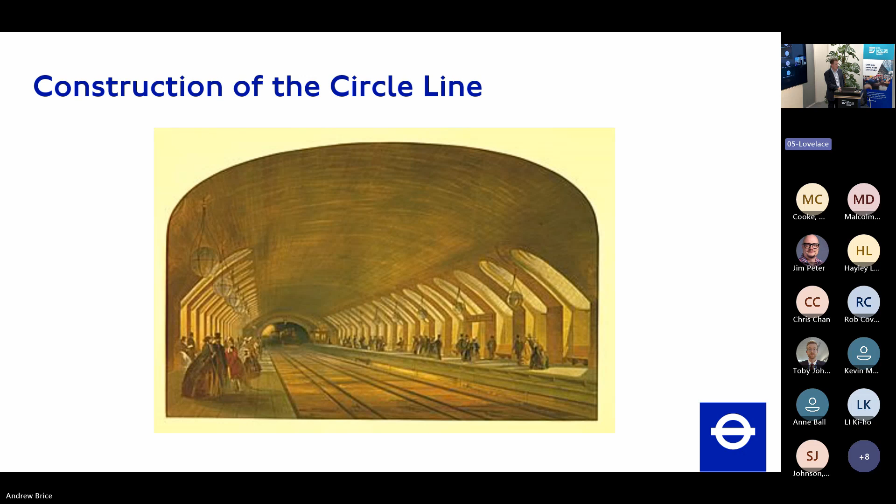So in terms of where we're going to go, we'll start by talking about ride quality, then structure gauging, platform assessment, train arrestors, conductor rail, and what I loosely call 'others.' It's not to demean the others, but we'll spend more time on items 1 to 5.

So generally speaking, in our experience designing a train, one of the things we're interested in is looking at the movement of the vehicle within the specified kinematic limit. We know that's a trade-off between the space that is available, the way the track is maintained, and the suspension of the vehicle.

What we don't want is a track that's so difficult to maintain we can't get out there and maintain it. Equally, we don't want a vehicle that moves so much in response to the track that we can't predict its movement, and it doesn't keep within the kinematic limit going forward.

Particularly for London Underground, access is at a premium. There's next to no places where you can store things. So in essence, the tools and equipment we take down at the start of engineering hours and take them back again at the end. Logistics is a major issue from the viewpoint of the track engineer, and therefore getting the right balance between the two is key.

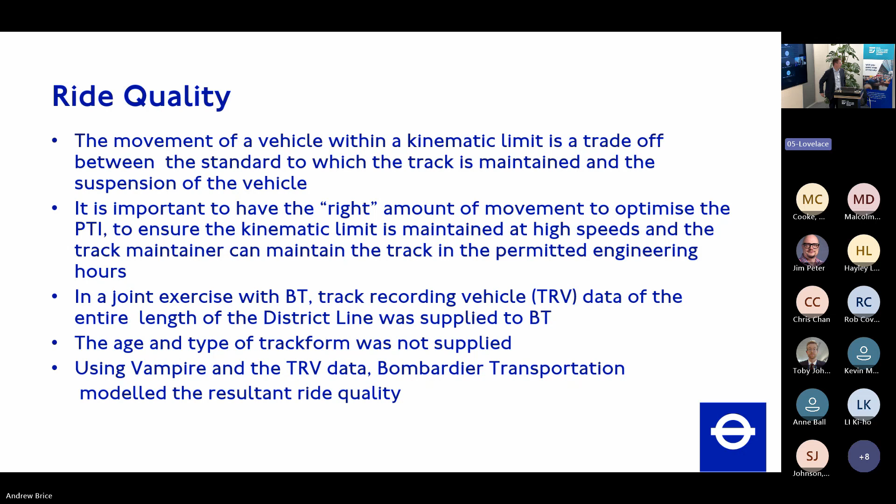When we did an exercise for SSOC with what was then Bombardier, we looked at track recording vehicle data for the entire District line. We didn't tell them the age or type of track form for the data. They then used the TRV data with Vampire to model the resultant ride quality. What came from that was they identified an issue with trains running faster than 70 kilometers an hour, where the set ride quality parameters were exceeded.

We translated this through into a ballast memory issue, to do with the way the track used to go down in 18-meter panels joined together. The pleasing thing was that on the one section of the District line where it did meet the ride quality parameters up to 100 kilometers an hour, that coincided with where we renewed the track.

So from the viewpoint of the track engineer, this was immediate validation that we were doing the right thing from the viewpoint of the rolling stock engineer and standards. We then repeated that for sections of the Metropolitan line where we carried out track renewals, and there was a good correlation between the two. So, independent validation of why we were renewing track, and that we were renewing it to the right standard, which is always pleasing.

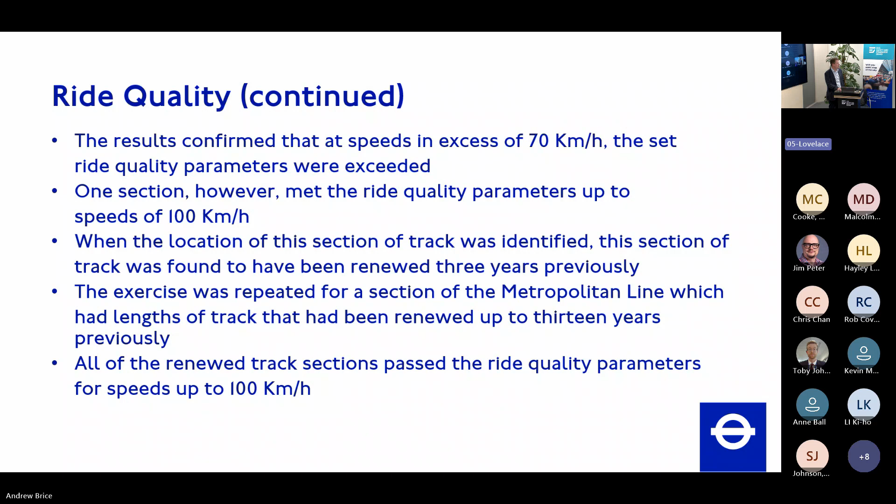In terms of structure gauging, I apologize if some of you have seen this type of slide, but very much on the Underground we have something called the kinematic limit. The kinematic limit is independent of speed, or up to 100 kilometers an hour, depending on the particular line speed. The idea is the train stays inside the blue, and the infrastructure stays outside of the structure profile.

Now, for a lot of undergrounds, compared to the mainline railway, we tend to work with smaller margins. Typically, for the subsurface railway, we look to have 50 millimeters between the kinematic limit and the structure profile, so that when a train runs, it should have about that much clearance between the two.

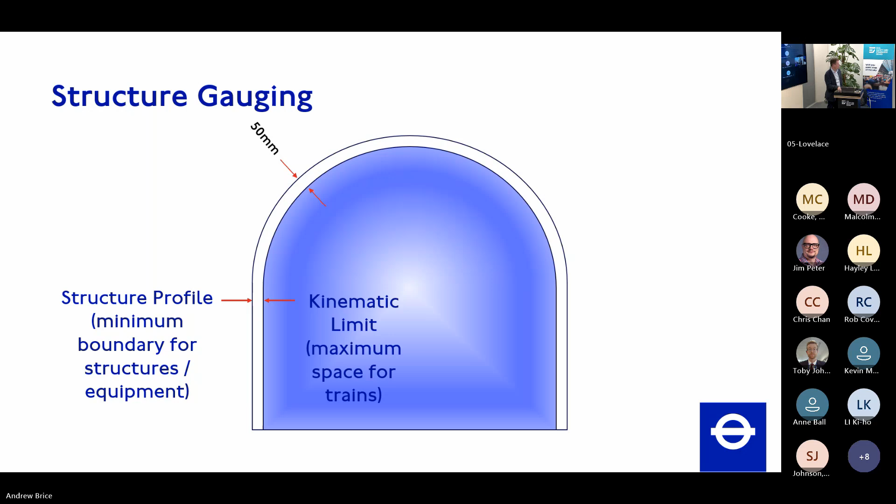When we start looking at issues with new fleets, the first thing we say is, okay, we've got standards, we have a set structure profile. The structure profile will vary between where tube trains run and where subsurface or surface trains run. But the first question is, are we compliant? Because with the best will in the world, given the age of the infrastructure on LU, invariably there's somewhere where we're not compliant.

We then ask ourselves, if we go with the kinematic limit as specified in standards, what will a concept vehicle give us in terms of maximum capacity, i.e. how many people we can carry, compared to the need for safe, adequate clearances?

Having completed questions 1 and 2, we then go and talk to our stakeholders and say, what remedial works do we need to do? So, for instance, when we were looking at SSOC, we identified approximately 10 kilometres of the Circle line that would need to be rebuilt. Now, that doesn't pass the value for money test, and it's certainly not practical, and it wouldn't meet timescales.

We then go to platforms and ask ourselves, what are our existing heights? Are we generally compliant to standards? Are we high or low? And then, with the concept train, what does that mean in terms of what we would need to do? How can we optimize the platform-train interface as much as possible based on the existing infrastructure? If we need to make a change, what are those changes, and what's involved with doing that work?

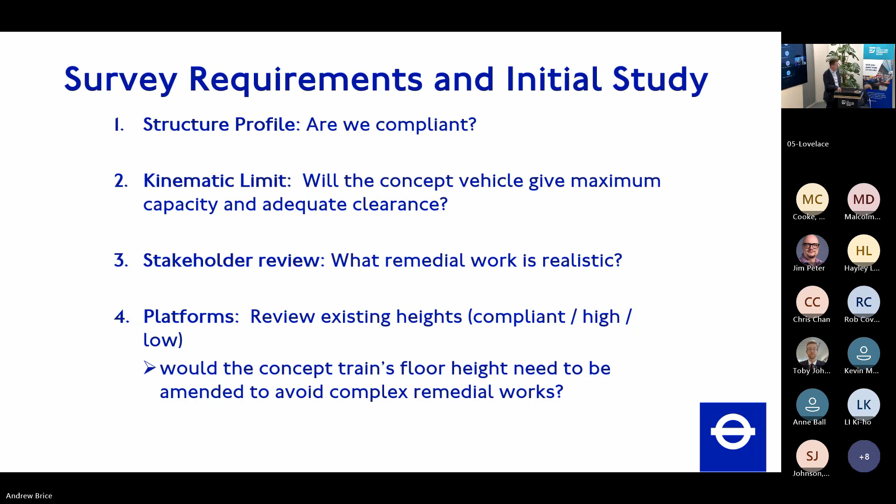So if we move on, we've also had a bit of a technology boost during the last 20 years. If you look at these photographs, prior to 2004, it was very much conventional wooden gauges that had been used for the previous 100-odd years on London Underground. They are good in the sense that they give you an immediate visual image of what's going on, and relatively speaking, you can identify what is the offending part of the infrastructure. But it's very labour intensive.

As you can see from the subsurface frame on the left-hand side there, typically you need 3 or 4 people to move the gauge as you go along the track. And it's also quite difficult to gauge readings around the profile.

The tube is a little bit easier to work with, again, a good visual image, but once you've taken your measurements, the iterative process is quite difficult.

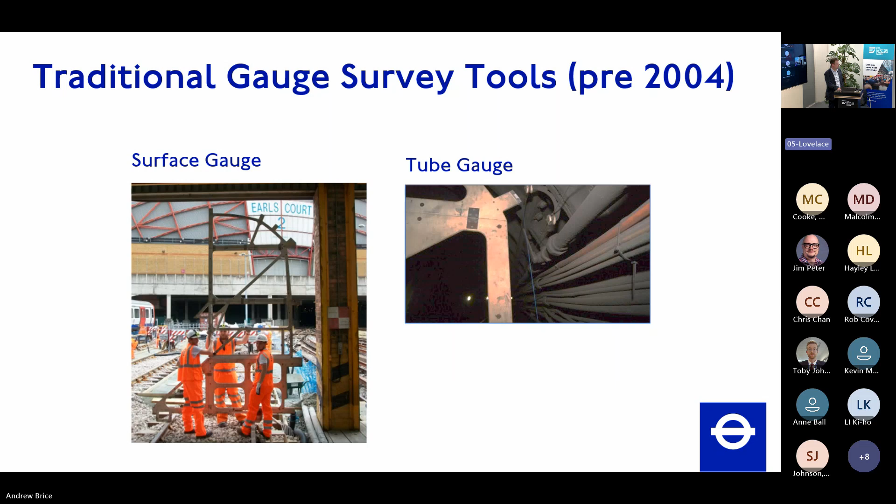Following on from post-2004, as much as the railway industry is now, from the viewpoint of track, both on mainline and on TfL, we all tend to use the type of equipment you see here, where you've got a scanner based on a trolley that runs on rails.

The issue you get, particularly from an underground perspective, is that as you push the trolley through, you actually generate a helix, and the distance between the helix is key for the type of clearances you've got.

Unlike Network Rail, who have their own train-based gauging system which runs through the network, because they generally have greater clearances than are on the underground, that's an appropriate technique for them. If you try doing the same thing on London Underground, you'd probably miss most of your clearance infringements, so there needs to be something done in greater detail.

We've been working with companies like Leica and others to evolve this equipment and the post-processing afterwards. So from the scan, what we end up with is a series of sections, and against those sections we plot on the vehicle profile, allowing for curvature and allowing for cants.

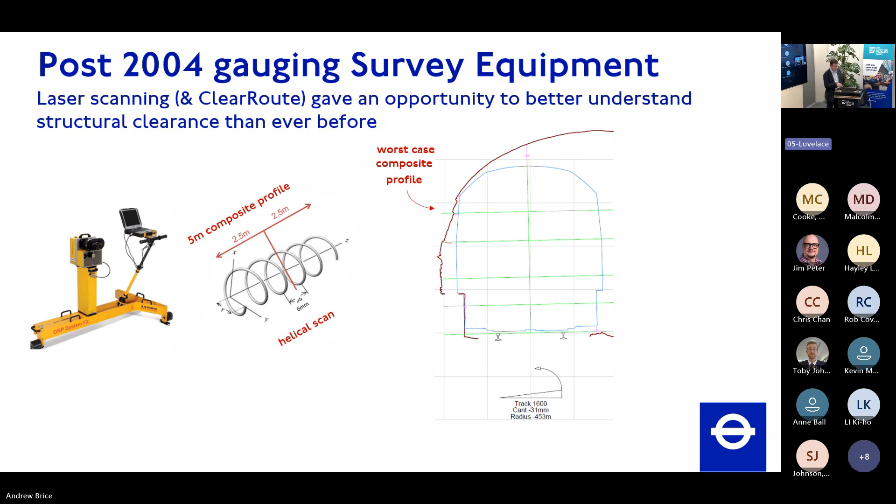From that, what we can end up doing is saying to ourselves, well, if our infrastructure is quite difficult to modify, what we can do is put together a composite infrastructure outline and then say, what does that mean in terms of our kinematic, and do we make a modification to kinematic? Obviously, the trade-off is if we have a smaller kinematic, that impacts on the train builder, but it depends where that is.

That's something we did on this example here for SSOC back in the heady days of August 2004.

What was also quite interesting for our civil colleagues is that we identified that the previously thought-of horseshoe-shaped tunnels had actually flattened over a period of time, and that there was a clash around the cant rail level here that was very difficult to resolve from the viewpoint of the civil assets.

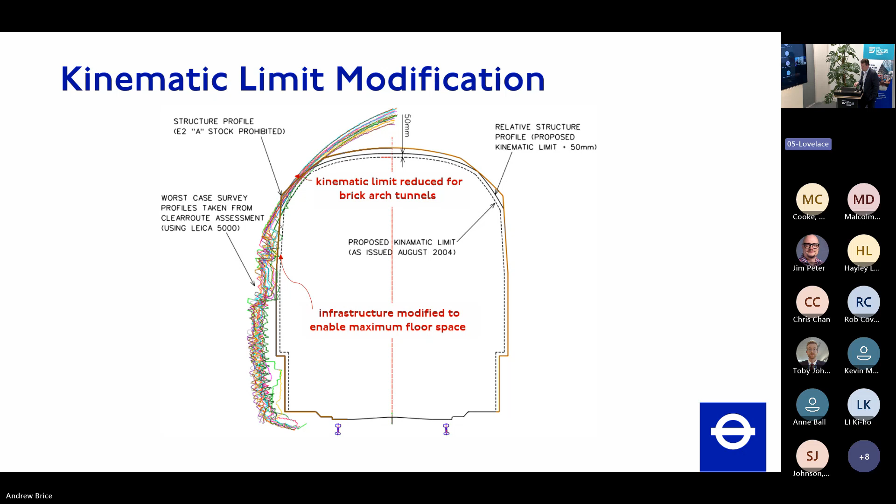So we took the decision that we would make the kinematic limit smaller in that area, but in terms of the usable space for passengers, that was maintained. That would seem to be a reasonable trade-off.

That has maintenance tolerances. The train itself has tolerances in terms of how it's maintained and how it responds, but also in terms of how it's built. We did have a windy Friday afternoon in Neasden when we measured across the train, and it was a different dimension to what we were expecting. But Bombardier assured us that's okay, and we worked on.

Equally, platform nosing is maintained. They do replacements, but they won't necessarily check it back against the optimum track position, and therefore you can start to lose that relationship between the two. So, within those three, there are tolerances.

Gauging by its very nature is very conservative. If you're not careful, the build-up of tolerances can work against you. So, because we were trying to optimize the space between the train and the nosing, to try and bring it down as small as possible.

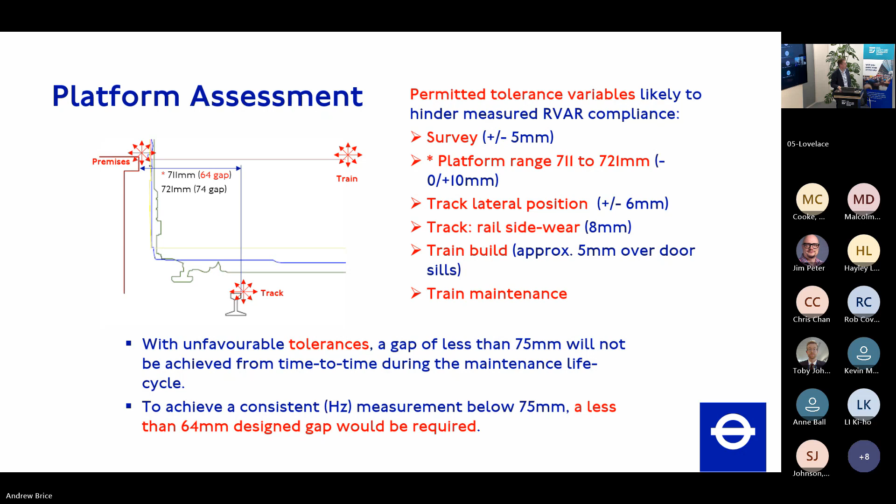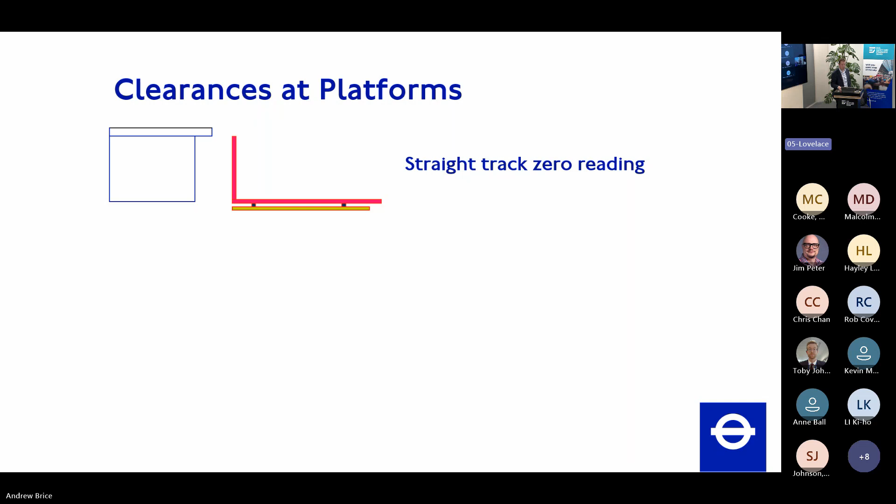So in terms of clearances at platforms, straight level track is really easy to work out. Fortunately, London Underground doesn't like straight level platforms. You then move on to a situation where the track is canted away from the platform. That's great from the viewpoint of the ends of each individual carriage, because of end throw, they get closer to the platform. But if you have doors towards the centre of a car, they move further away from the platform, so your gap gets worse.

Equally, if you go the other way, the centre of the train and the doors closest to the centre of a car are closest in terms of distance between train and platform. So you then end up asking yourself, what have I got in terms of combinations of curvature and applied cant? And particularly from the viewpoint of complying with the RVAR regs, where do I end up electing to choose the doorways that I'm declaring will be RVAR compliant for as much of the particular line as I'm working on? There's this whole iterative process to go through.

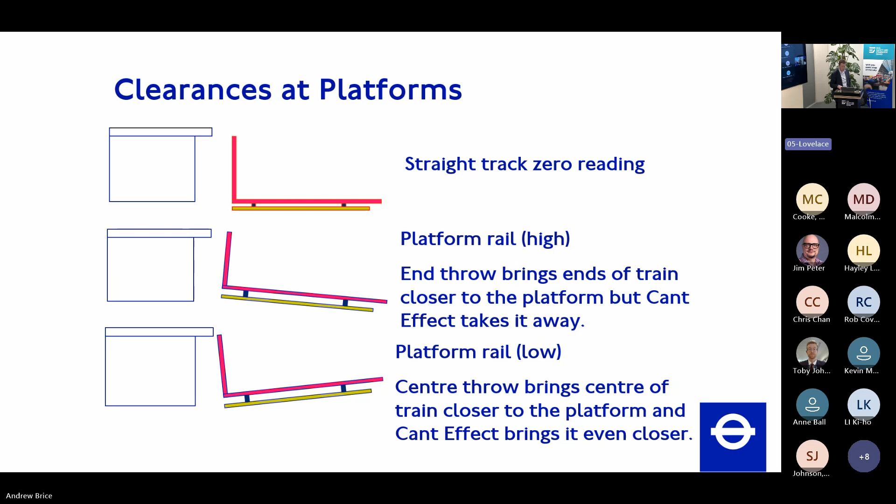The other thing we found we have to take into account is that while you're looking at level access for a train that's at rest, trains obviously brake into their stop position and then accelerate from their brake position. For London Underground trains, a train as it comes to the top of ramp in the direction of running, the front of the train is doing approximately 35 miles an hour. When the back of the train gets to the top of ramp, it's at 0 because you braked. Then for the back of the train as it's leaving the platform, the front is at 0, but the back is doing 35 miles an hour.

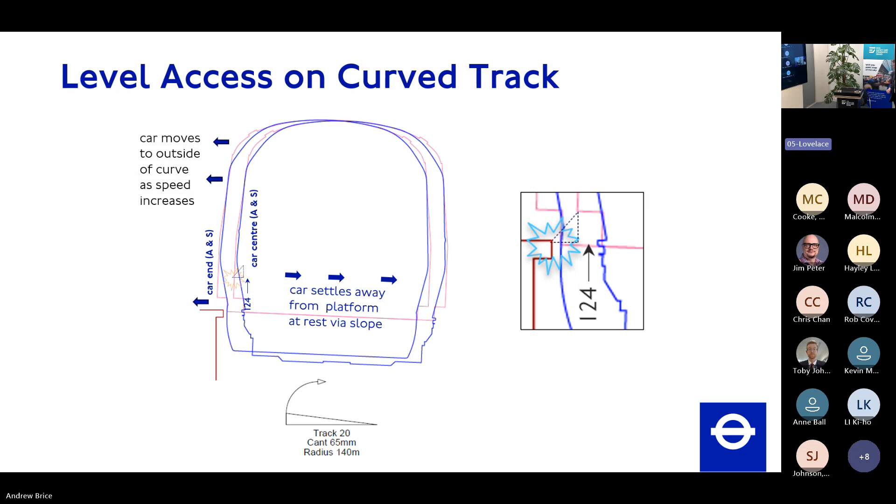One of the things we ended up pioneering for Deep Tube was platform humps, such that at the RVAR nominated doorways - in this case for 09 stock on the Victoria line - we would have steps and gaps at the nominated doorways where the offset was less than 75 millimeters and the vertical step was plus or minus 50. These have worked quite well, not without issue.

So for instance, if you look around the platform furniture, you've got manholes sitting in the surface of the platform. Has the track been renewed? Is the track at optimum alignment? Because you end up having to optimize the alignment, it could well impact here. Obviously, we need to consider the slope coming off at the access-egress points to a platform. Victoria line is relatively easy to work with. You start taking that onto some of the older lines, as they're currently finding on the Piccadilly line at the moment - it really is a magnitude of problem of difference as you go through.

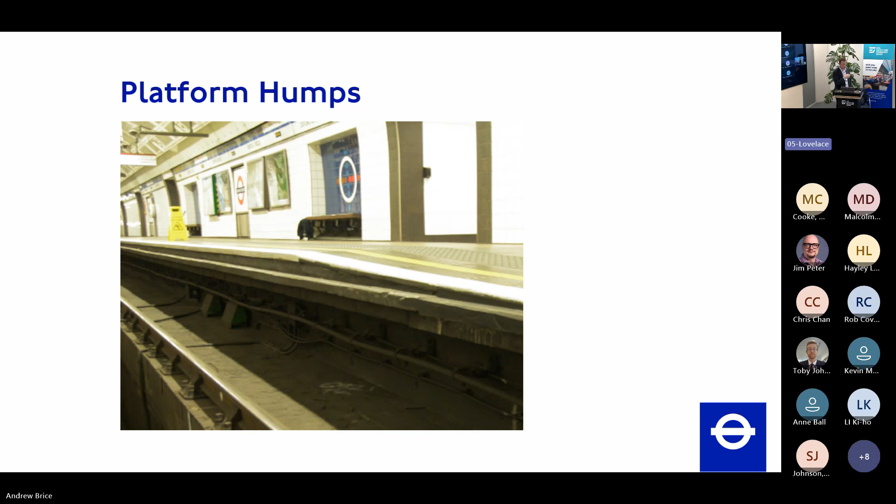This is an example of a well-known platform on the underground, and you can see the issue about curvature as you go through. Here, as you can see, we're sitting on the inside of the curve. So at the end of the carriage, we're really tight for space. But because of the curvature and the way the train sits on the track, we end up having a lot wider gap at the particular doorways as you go through. That's the joy of the infrastructure, the age of the underground.

But it is a very real problem, because obviously what we don't want is people falling down the gap, with the incidents you get there. So there's been a lot of head scratching and thinking about what we can do to try and sort those sort of problems out.

So in terms of benefits and weaknesses, it's great from the viewpoint of level access, no or a small vertical step. I know there is a debate about what that small vertical step should be, but I'm not going to touch on that now. But if you think about more modern metros, you don't worry too much about walking in and out. For instance, Docklands Light Railway is an example of where they've got that pretty good.

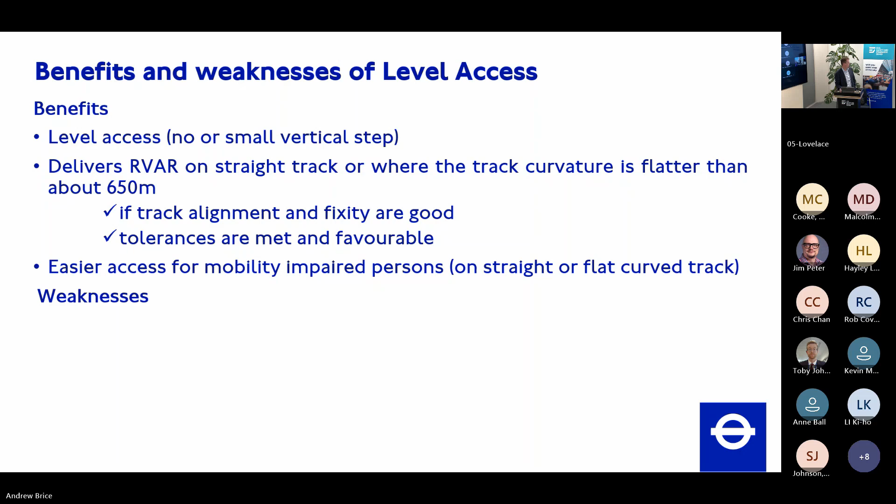So in terms of the weaknesses, if you're not careful, particularly during transition - one new train in, one train out means you've got this mix of fleets, which can create issues when you go through, and you can actually end up sometimes making the horizontal gaps worse during transition until you've got your new fleet in place. And as I say, there's difficulty in achieving RVAR compliance on tight curves or where track is poorly aligned.

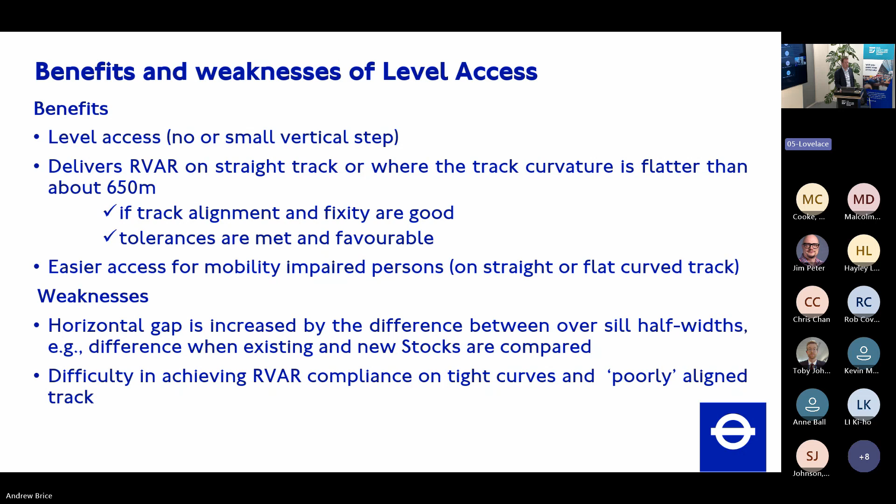Again, we're doing that type of work. The gauge was also developed from the viewpoint of human factors - it's continually having to bend down.

And in terms of testing for doors, because the stopping tolerance is plus or minus a meter, what you end up doing is taking 9 sets of readings. So you have both sides of the door and the middle of the door at 0 tolerance. You then repeat those 3 readings at plus 1 meter and minus 1 meter from the stopping tolerance as you go through.

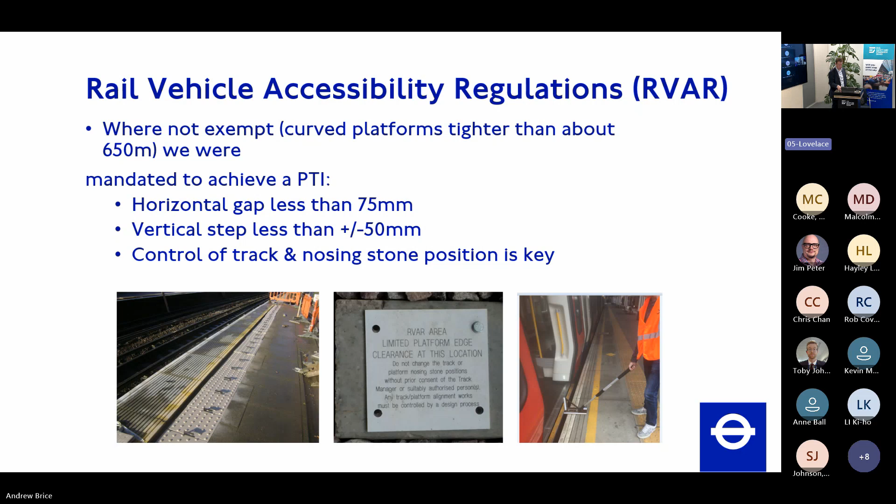So again, often the track engineer is there chasing the millimeters. There's nothing more frustrating when the test team go out, measure the gap, and it's 77 millimeters, and you need to go back again. It's quite frustrating.

One of the other things that we talk about is, are we leaving things in a tolerable position from a risk perspective? And particularly with gauging, it's difficult to get there because inherently gauging engineering is conservative.

One of the things we have been doing is working with companies like DGauge on using probabilistic techniques to see how that helps us manage the risk. And I know that work is continuing on the mainline network, and we continue to work with them on our fleets as we go through.

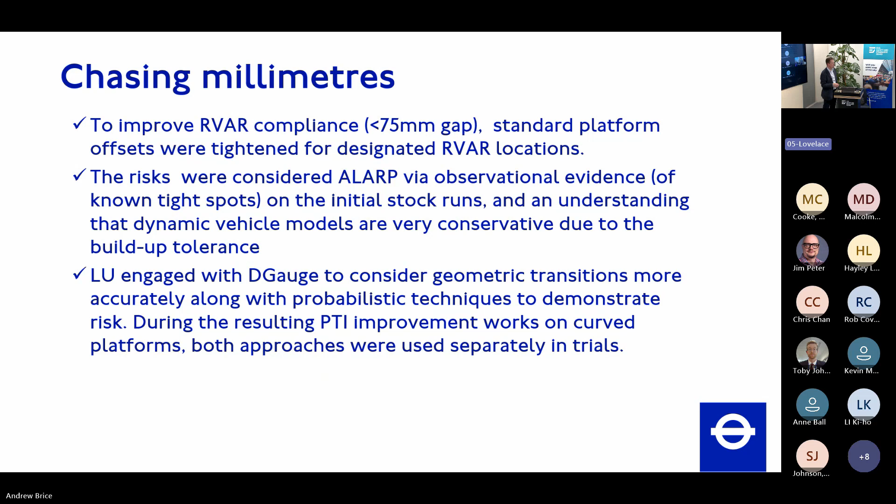And therefore, particularly from the viewpoint of curved track, sometimes we will use it to say where we can take an existing gap from 160 millimeters down to 120 millimeters. So we know we don't comply with RVAR, but from the viewpoint of improving the gap and therefore lowering the risk, if we can get a gain using probabilistic techniques, that's something that we will actively look to do.

The other thing we often look at is train arrestors, and we end up asking where the contact points are on the existing train. What we don't want to do is introduce a new train that, first time, ends up engaging with the train arrestor right off the driver's cab. That's a complete train we have to take out of service. So we look to model the interface zones. Invariably you'll have at least 2 train types, and you'll also need to look at engineers' trains.

When we were looking at the Uxbridge branch, we had the joy of Piccadilly line trains, 73 tube stock. I had to redo the exercise for 24 tube stock as well, as at the time we still had A stock in service, as well as bringing in S stock and engineers' vehicles. So we had 5 train types we had to work with on the Uxbridge branch, which got the head scratching a little bit as you go through.

Also, what we found was that the design of the train arrestors, or buffer stops, had been derived empirically over the previous 80 odd years. There was no design calculations, no way of understanding factors of safety. The bolts that were specified, nobody could find out why they specified those bolts or those gusset plates. So we ended up in a situation where we really had to go back to first principles.

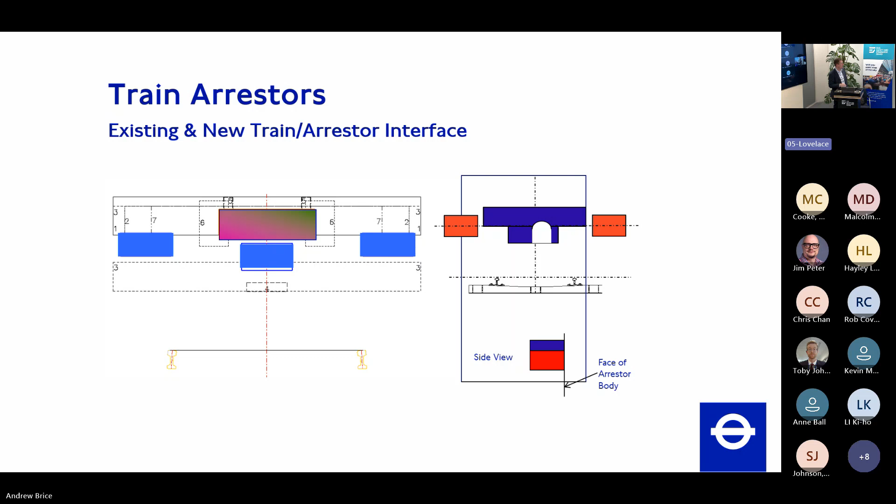So typically, when we talk about upgrading train arrestors from a track perspective, I've touched on train arrestors. We also need to look to see does the existing conductor rail layout fit for purpose? Does it go far enough? Because what we don't want, particularly at terminals, sidings, depots, is to find that the front shoes are not on power, and therefore the train might sit down and not go. You have to consider conductor rails.

Are there signals that need to be relocated? The sight lines on new trains are very different to old trains. Invariably it means the signals need to be put further back in a different position. That's great in a number of our open areas. If you're in an enclosed tube tunnel, relocating signals in that area is really quite difficult.

We also need to consider where insulated rail joints are, where train stops are, safe operation of trains. We also need to consider operational signals, stop marks. There was quite a discussion over stop marks for the operators in terms of what was permitted for them. Could they see the diamonds sitting in the four-foot of the track? No, that's not good enough for the new trains. Therefore we need a series of stopping chevrons. You then have to work out how you locate the stopping chevrons.

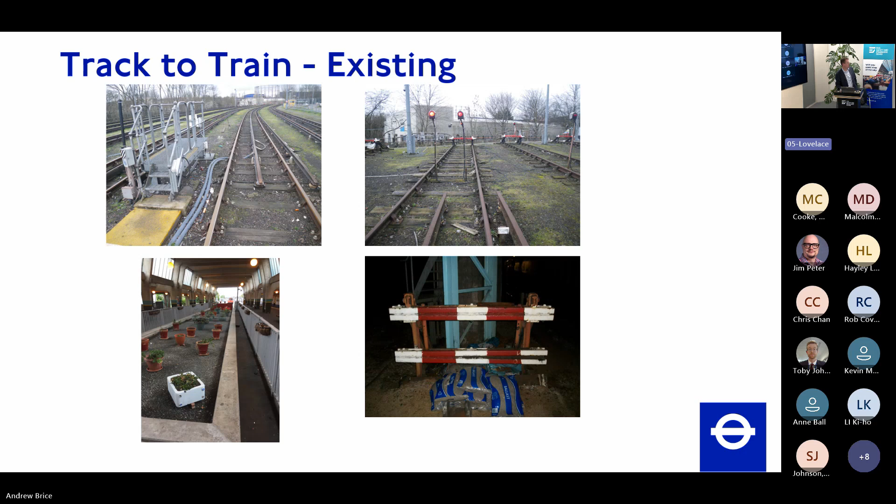This is an example of some of the issues that you have when you're inside a turnback siding, as is common on a number of London Underground lines. As you can see from here, you've got the existing bullhead rail, and you're inside a cast iron tunnel.

Someone's chucked some sand at the ends as a means of stopping the train should it miss the stop mark, and there's a nice bright red light there to tell the driver don't go to the sand as you go through. It doesn't really meet the needs of a modern railway as you go forward.

So consequently, you end up saying to yourself, how do we upgrade? There's a series of staging works where effectively we put in a temporary train arrestor, do the works in and around, and then once we've completed those works, we can put a modern friction arrestor on there, because if a train hits it, it brings the train to a stop without breaking the train, and the train can carry on its service.

Also you'll notice there's not masses of room in there. Remember my earlier comment about storage or lack of storage space. So with these, you can only ever get access in engineering hours - effectively they're locked by the railway during traffic hours. So thinking through the logistics and what's involved is quite complicated.

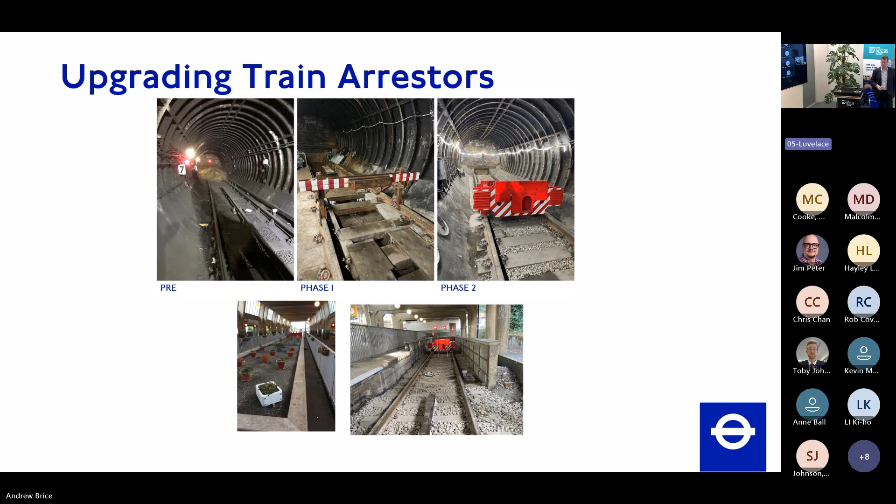Conductor rail shoe. Underground is a 4-rail system, positive and negative conductor rail, as well as the running rails. We also have a fifth rail called the check rail.

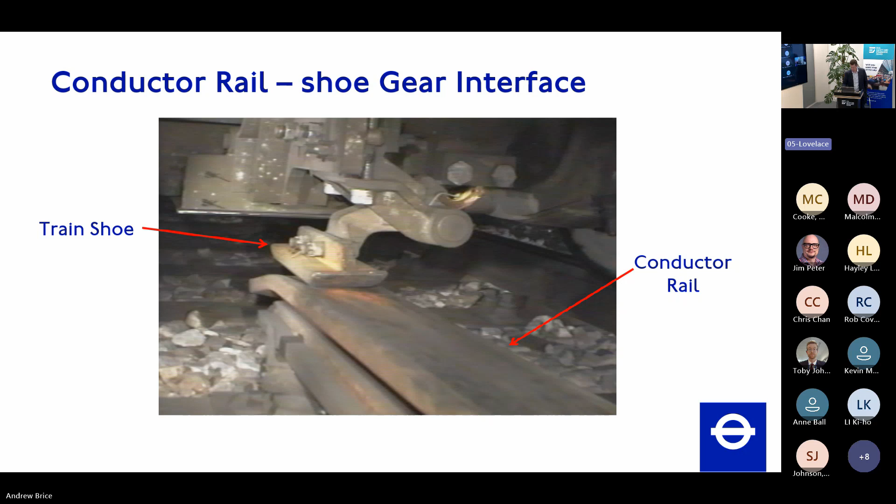So we have to look at the power infrastructure and say, in terms of the breakers in place, if the voltage is going to go up to 1,000 volts, you don't want them to trip the first time a train goes into regen. So you need to look at your power infrastructure and say what needs to be changed, what needs to be increased.

One way of improving the reduction in voltage from the substation is to install something called composite conductor rail, and London Underground has been installing composite conductor rail since the 1990s. It's a really effective way of reducing the power loss from the substation.

It has its own vices, and from studies we've done, we've assessed it as having a 75-year life. But equally, if you've got a wet tunnel, water falling off the conductor rail dramatically reduces the life of your asset. So again, the civil engineer has a key role to play.

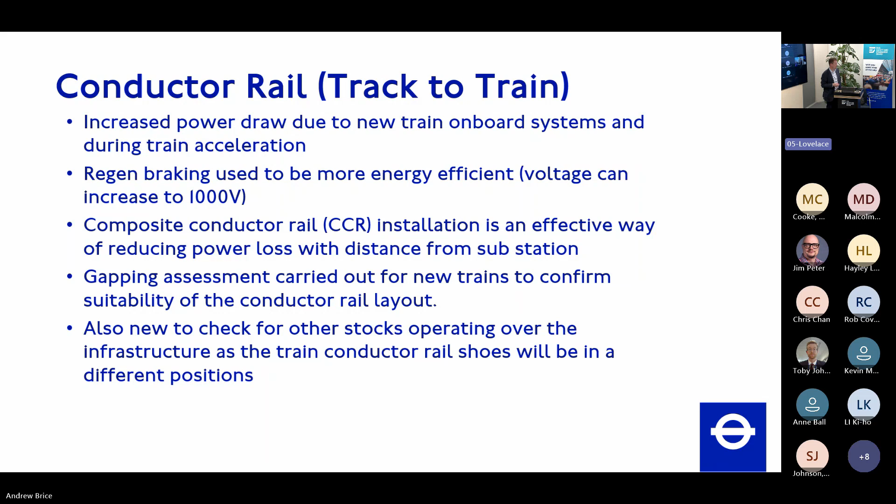So ideally, if we've got lots of space, we'd like to go for something like this, what they call Section 7 composite conductor rail, which has the greater cross-sectional area. However, due to space, we sometimes have to go for a smaller section, and that in itself creates issues.

So you then measure what you've got in terms of space for the existing positive conductor rail that sits in this place, and ask what's my clearance to the render? We need to provide 25mm clear at all times. I may or may not be there, and therefore there'll be a secondary means of protection involved. If I put in a form of composite conductor rail, what does that do in terms of my clearance?

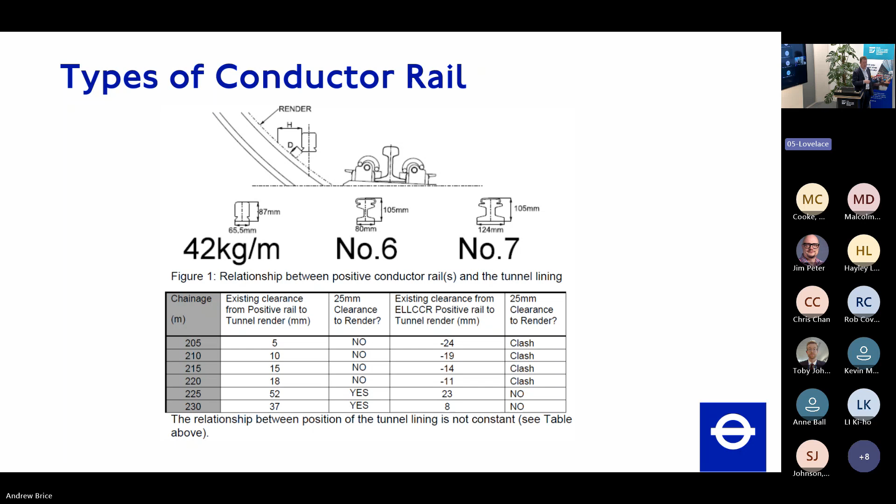So again, the whole power solution depends on what the power engineer models and therefore what they recommend to the track engineer in terms of the conductor rail that needs to be installed, and it has its own further challenges as you go through.

Sometimes we're doing track reconditioning works at the same time that we want to change the conductor rail, which adds a little bit of complication. Or we've decided the works have taken place that's sufficient, so we're not going to be renewing the track for another 20 years, and therefore we can go out and install the conductor rail.

Composite conductor rail expands more than steel conductor rail, so you have to cut more expansion gaps into it to allow for that expansion. Each of those gaps will have cabling that runs round. So when you decide where your gaps are going to be, one of the things you have to check is whether there's sufficient room to run the power cables around the gap, allowing for expansion of the conductor rails in traffic.

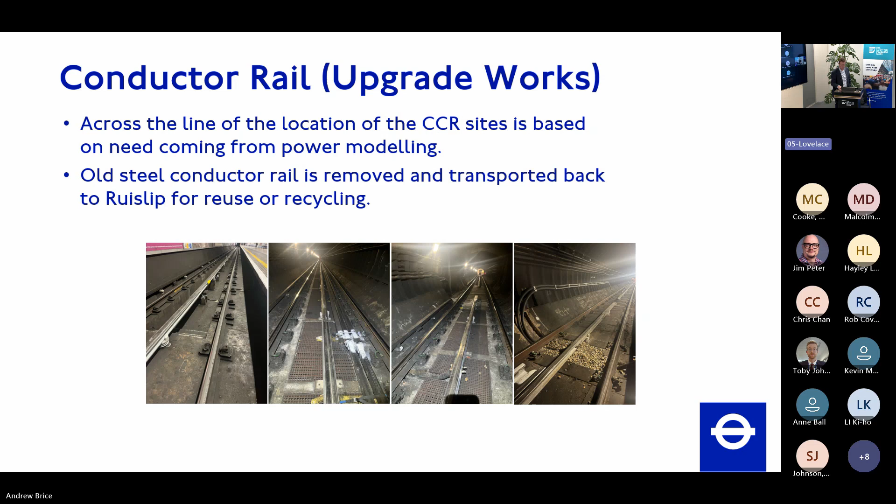The old steel conductor rail does get removed. We try to recycle where we can on other London Underground lines, but we are restricted for space at Ruislip Depot with how much we can hold, and then it tends to be parted off and traded off against carbon credits, things like that. In terms of other track issues, I've touched on sight lines.

And that sort of ends up describing where the optimum place is going to go. However, what we find is that you may have a signal that has to stay there, but it's actually already infringing your structure profile. So you end up saying to yourself, I can't move it longitudinally because the signal engineer tells me it's got to go there for safe operation of the train.

So what can I do? Can I go up? Normally. Can I go down? But of course, if I go down, I need to check can it still be seen or not. Or do I go in and can I nudge it across 30 mil to get the right clearance? Often the type of clearances that we are dealing with is of that order.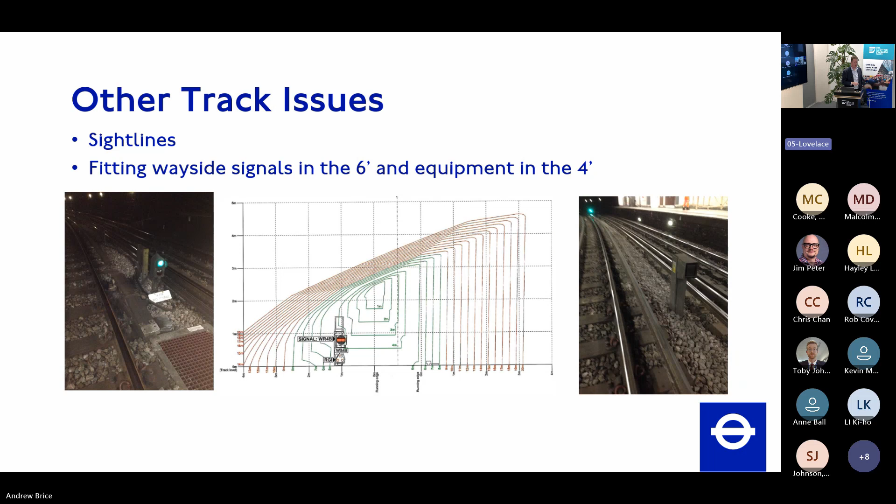Moving on, this is an example of the sort of thing that we end up working our way through in terms of saying, okay, where's the new train? Where's the stop marks going to go? What type of signage do I have on the railway? Is the conductor rail the right length? Where's the signalling equipment? How does it all come together as we go through for these things?

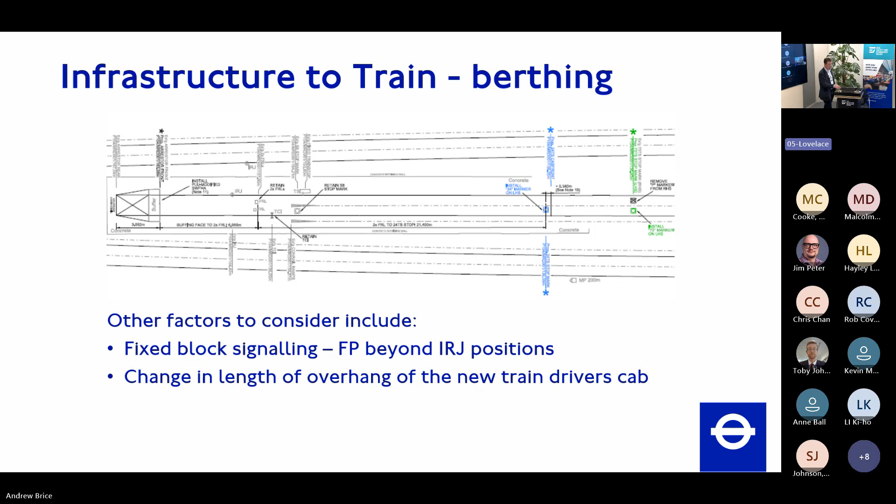One of the things that we've had to look at as well is that with the change in new trains, the driver's cab extends further over the front axle compared to the old trains. That means that if the signalling engineer has been really tight for space for positioning their joints relative to the fouling points on different routes, you can end up with a situation where the signalling system still works, but because the overhang is longer, the trains actually come closer together. That's something that we had to work with when we were working through the rollout of S-stock in particular.

Wheel rail interface - I won't profess to say a great deal about it because there are others who could talk forever and a day about it. But it is an issue we need to carefully manage, because trains will end up having a new wheel profile. The old rails are worn to the profile of the old stock, so there's a transition period as you go through, and you have a series of problems managing the wheel rail interface.

For instance, here, shortwave corrugation is an issue, RCF is an issue going through there, squats and so on. What we've also found, just to make our life easier, is if you do a new fleet of trains and put a new signalling system on, it's really difficult to get the wheel rail interface back together again.

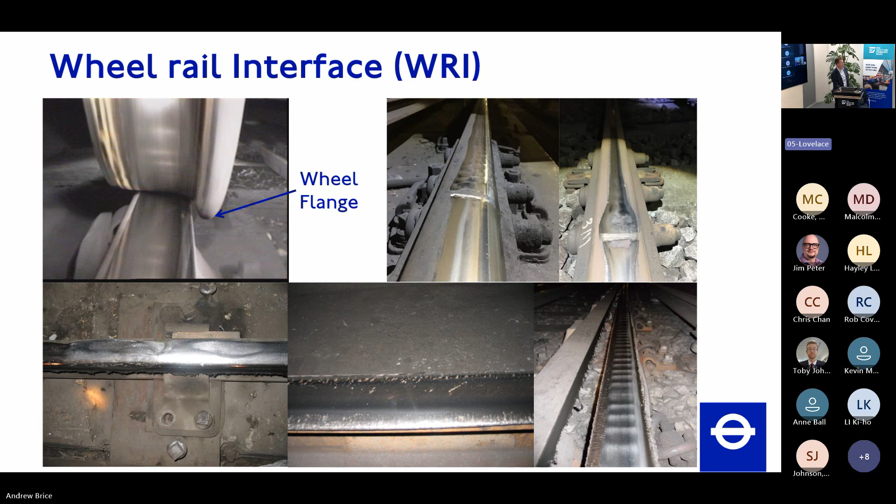When we went to the new signalling system, 12mm was just enough for the wheels of the train to get into the plastic under the signalling system control. And what you ended up with was this deterioration of the railhead. That took about three months to develop. So it can happen very quickly, very rapidly, and you're then finding you've got a new set of problems that you need to work with.

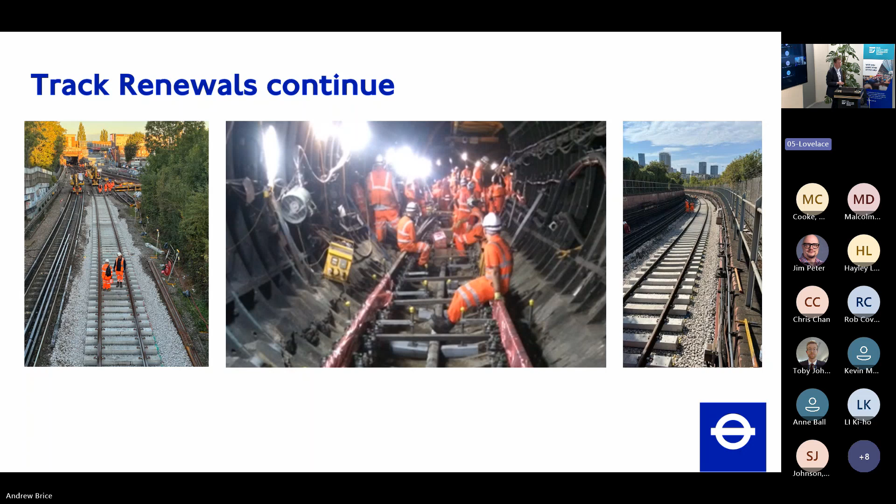So when they say, oh yeah, can you just go and renew this piece of track - in a deep tube tunnel, there's a lot more involved with it. At the moment, we're looking at how we can maximise our production in those type of environments, but with current access in a deep tube tunnel, 350 metres takes about a year to do. And of course, at the end of engineering hours, you have to check that the site is safe and back for trains, to make sure you don't overrun. So the gangs that do it are skilled, and we desperately need to do something different.

Questions? Thank you very much.